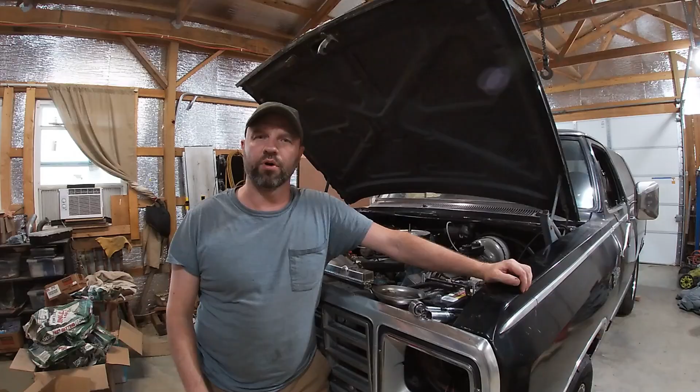This is a 360 Mopar with the Mopar 508 Purple camshaft in there, about 9.8 to 1, with dished pistons on it. So that's a bit of a duration camshaft, like a 248 at 50. I'm trying to get this tuned in. I've driven it around a little bit, and I'm getting it to where it's a lot better than what it was originally when I was trying to get the thing pulled in here.

I'm going to go over some things about tuning with kind of the bigger cam, specifically my combo right here. It's kind of borderline too much duration at 50 on the street. I mean, yeah, there's people who have something ten times bigger than that, but for the most part, you're getting into where your vacuum is not going to be good, so your vacuum booster isn't going to work as good, and all that stuff. You're in that range. So let me show you a couple things over here on a carburetor I got on the table that I am doing to tune this thing up.

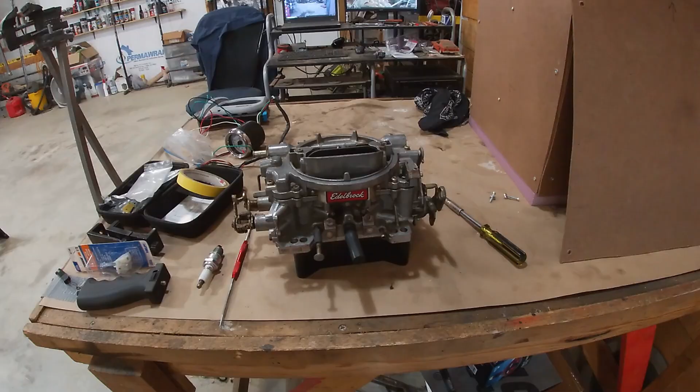Okay, so what I noticed was I'm moving my idle mixture screws, which are these right here, and it should change the idle when you're moving those in and out, and I really wasn't getting a good defined peak and RPM change by moving those.

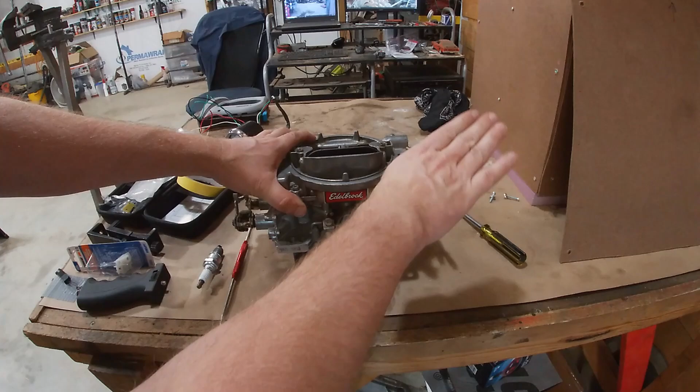So a couple things can cause that. One is the throttle right here is opened up so far, because this is just your idle circuit. So your throttle, if it opens up past the idle circuit, you start getting into your primary jetting, and it's starting to run off the primaries. And that'll make it where these aren't doing anything. So that was one of the problems.

I got my timing set. I'm at about 15 degrees right now, initial timing, and that's kind of the most I want to do right now until I get some of the other stuff taken care of and make sure I'm not going to spark knock. I don't want to just keep cranking the thing up there. So anyways, got that bumped up kind of where I want it. I'm locking that into place. That's a good happy medium for it, and I should be able to get this to run pretty good.

So I still had a little bit of issue with that, and I think one of the things that's going on is just the vacuum just isn't quite up where it should be. Now Edelbrock, what they do is, let me get one of these apart.

So this is where your metering rods are on an Edelbrock, and you see how simple it is to take it out. You don't have to take this screw all the way out. You got the little cap right there that rotates, and you pull it out. Super simple, you don't have to do much with it.

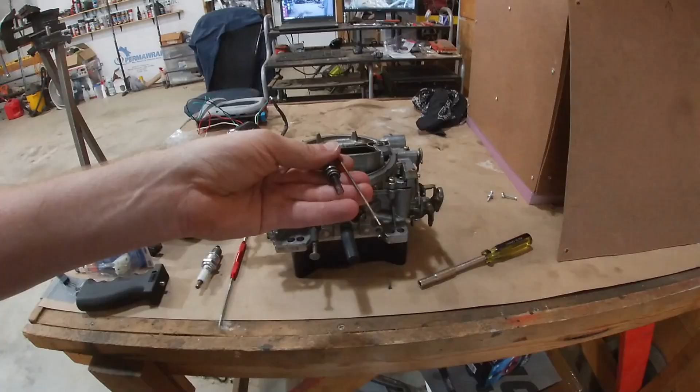So you see this setup here, you got a spring right there. Let me get a little closer. There, oh, it's gone. It hit the shop floor.

Oh, found it. So what's going on is this little tube here, there's a little vacuum hole, and it's trying to pull this rod down. So it's pulling it down, and the spring right here is pushing it up. So it takes a specific amount of vacuum, like this one I think was marked at 8. So technically speaking, at 8 inches of vacuum, that spring's going to overcome and push it up.

But everything's not an off-on switch like that, it's always going to be a temperature gradient. I'm looking at my heat transfer project over here, it's going to be a gradient.

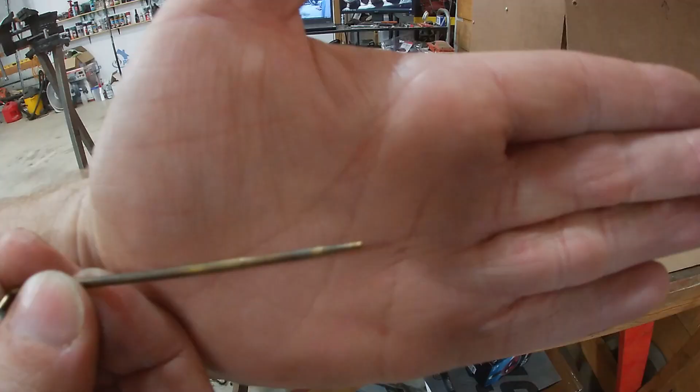Now, if we look at this rod, what's going on here, tap the screen, see how that's stepped right there? So that goes into the jet in the carburetor. So whenever you're in cruise mode, you're on the fat part of it, and when you're in power mode, you go to this part over here.

So I think some of my problem might be is the spring, because it's pushing up, trying to make it go to the skinny part. The spring is more than what the engine is pulling, or at least the vacuum signal to that spot is pulling. So what I did, I put a little bit weaker spring in there to try to help with my idle. I'm trying to get it to where I can tune the idle.

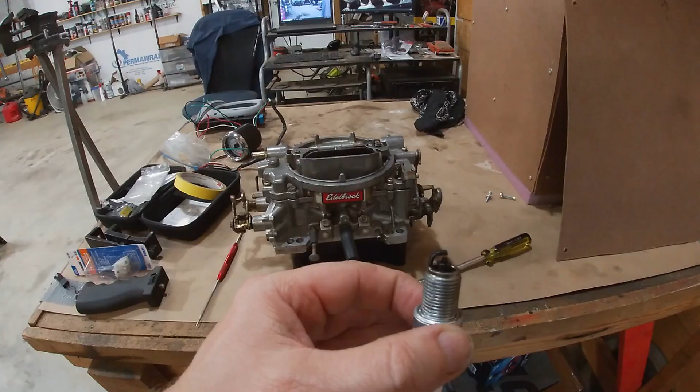Right now, I really can't do anything with it. The other thing, you see our plug here, we're getting it a little bit fouled right there, and I've been idling the truck quite a bit. So with a carburetor and a cam like that, it's going to start fouling the plugs out if you just sit there and let it idle and idle and idle.

But that's one of the reasons I did that, is I think maybe I'm getting into the primary circuit or the power circuit. It's lifting that up too high at idle, and I'm starting to get out of the idle circuit. So it's kind of a combination of some of those things, and that's what's making me run rich, which then you got to turn the screw more and all that stuff.

Another reason why I think I'm running rich, other than the spark plug, is I induced a vacuum leak. This is where the PCV goes, the positive crankcase ventilation thing. So I pulled that out and just let it suck air in there. Now normally that'll make your vehicle run rough because it's just way too lean, but it sped up really good and picked up a lot of idle with that going in there. So that means I'm getting air in past the carburetor, past the metering, to burn all that fuel.

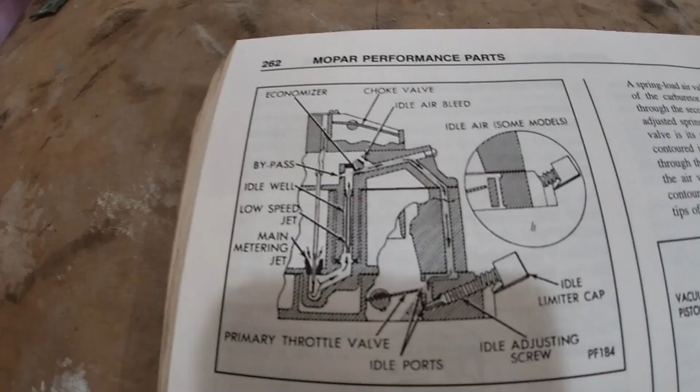Okay, I'm going to explain the... couldn't get the tripod close enough.

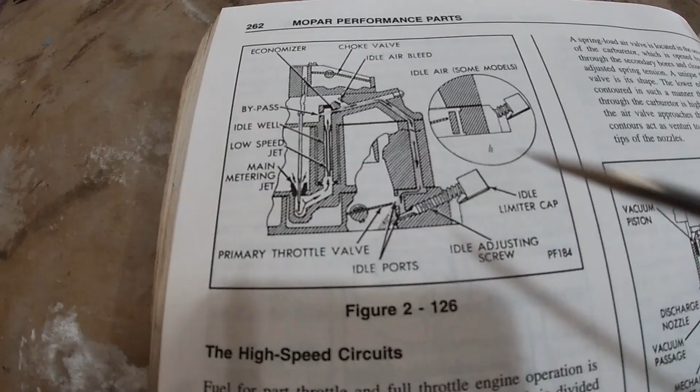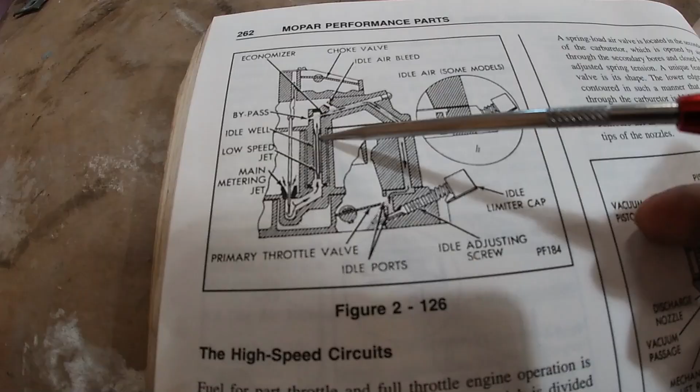I'm going to explain what I was talking about with why the idle circuit has anything to do with the primary and power circuit. So if you remember the jet, it's got a little step right there, and then the major step. This is where it's at when you're in cruise and idle, where it's supposed to be. If you look at the fuel flow, the fuel comes up through here, around all the way down to here. And then this is your idle mixture screw right here. So that's why they're related.

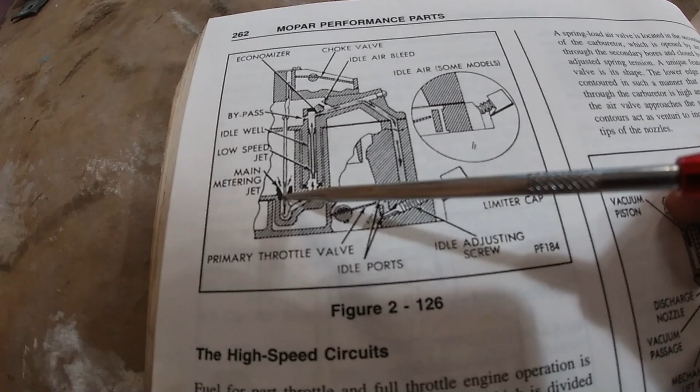If I'm over here and it's supposed to be on the fat part of that, and it gets to the skinny part because the vacuum or the spring is pulling it up because I don't have enough vacuum to pull it down, then it's going to make it run rich at idle. So that's why I changed that spring out, to maybe address that.

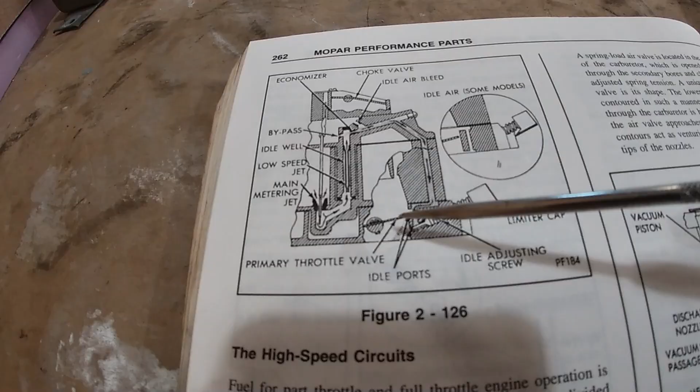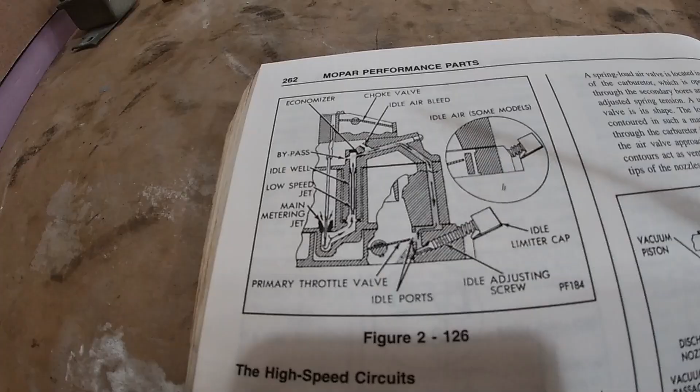I'm probably going to have to add some timing, maybe even bring it over to full-time vacuum instead of the part throttle vacuum, or ported. I don't like doing that, but it's mainly to get it, it's like going in with a computer tune and adding advance at idle for specific situations. That's how you can do that with a carbureted vehicle.

Okay, the other thing about the test drive, the brakes suck. Apparently my alignment with the camera also sucks. Anyways, so the brakes suck. I don't think the booster is leaking.

Now, if you look back in other videos, this booster wasn't working good, and I found out that the seal where the rod goes through that holds the vacuum was bad. Had to buy another one of those. Like one person in the world sells them, on eBay. I couldn't find anywhere else. Had the part number for it too, the Bendix part number. So I did that, painted it, cleaned it, and put a new little bleeder thing in there. So I don't hear any hissing or any weird stuff. It doesn't seem like a brake booster issue, but I also fiddled with the brakes, so I'm going to go in and bleed those because it's not real safe to drive right now.

The speedometer don't work either. I figured that out, I didn't have it hooked up, so I'm going to hook that up. So once I tidy these things up and feel like it's going to be something good to drive around... oh, I got the transmission fluid topped off too. We're going to be looking pretty good.

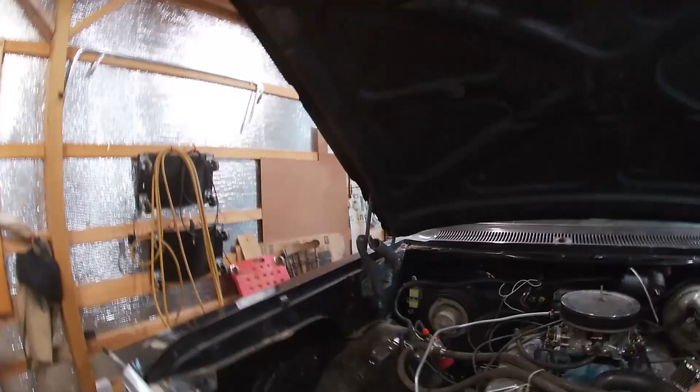At this moment right now, as far as starting, it starts phenomenally good. I mean, see the video on that, you hit the key and the thing starts. Even if I come out the next day or something, hit the gas one time, hit the key, and it starts right up. Okay, did a couple test drives, getting better. I do have the vacuum advance on ported now, but I'm still running rich.

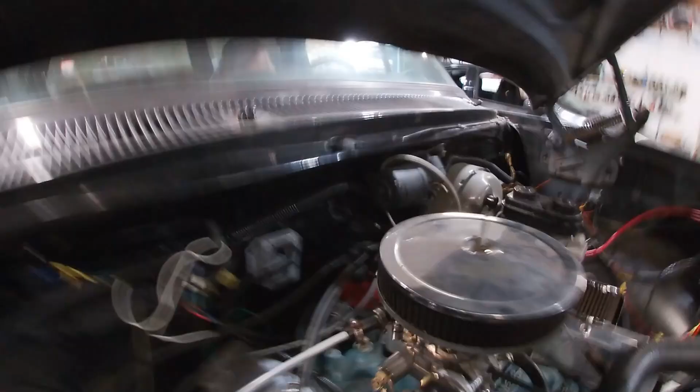I think the problem is the ignition system I have. I'm running the all-in-one distributor from Speedmaster, same thing as this PerTronix. We'll look at it over here. There's a reason I don't have that in the vehicle - the spark was so weak I couldn't even get it to idle. That's how bad it was, and there are some issues with that I've gone over before.

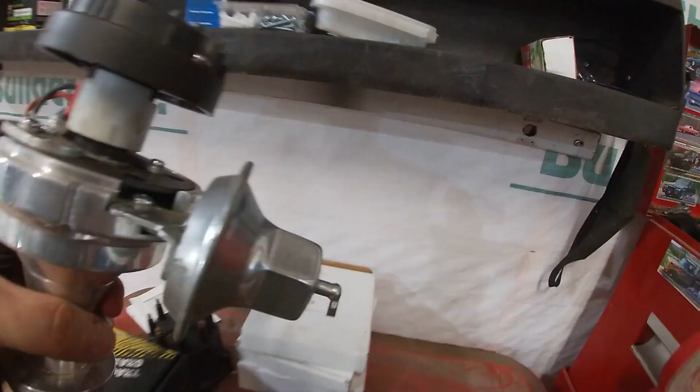If you look at what we've got going on here, this black wire right here is the distributor ground. That's what it does, it grounds it through the module. Got the ground right there, so it has to ground through here, all the way to somewhere.

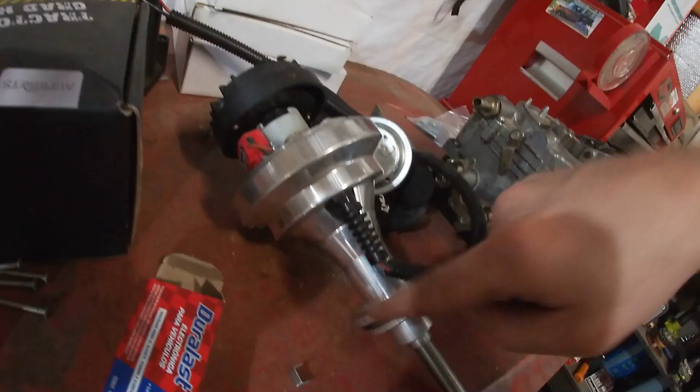This one and the Speedmaster have the same basic design, and I think that's giving me some weak spark. I could have added a ground to it, but I'm just going to fix it the way I want to fix it and get a good stock style distributor - I'll show you what I'm getting on that later - and eventually get an MSD box as well. I think that's going to cure this up, because we're running rich at idle. Added timing, it wanted some more. I think I'm a little much because I'm starting to get a little spark knock, but it definitely picked up.

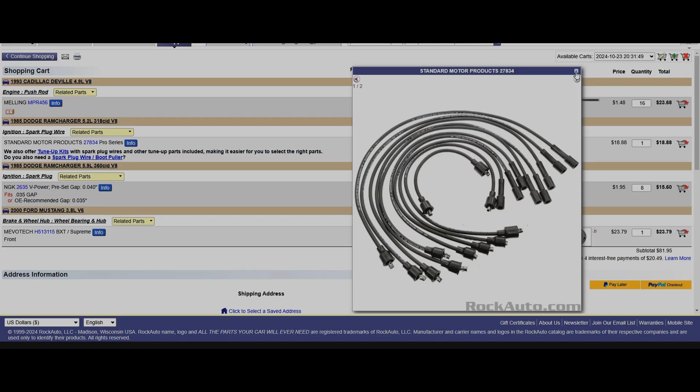The other thing is, since I got that distributor that uses different spark plug wires - that'll be the stock style right there instead of the Magnum style or HEI style or whatever you want to call it. And figured since I'm ordering, I'll go ahead and pick up a new set of plugs.

And I'm getting a wheel bearing for Jim. I cannot drive Jim at all, regardless of the engine, because the wheel bearing went bad. So that's what I'm going to be getting. I don't know when I'll put that wheel bearing in, but that's my tuning stuff for the Ramcharger right there.